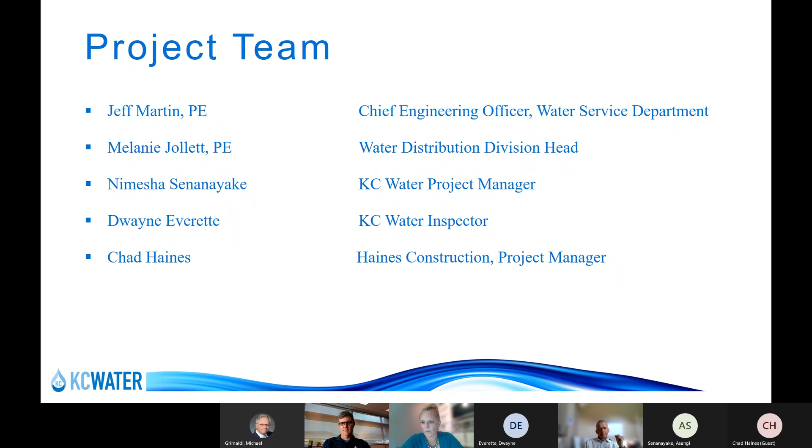Next slide, Nimesha. And with that, I'm going to turn it over to Jeff Martin, and he's going to give us some background information on water services. Thanks, Melanie. Good evening, everybody. Jeff Martin here with KC Water. So we'd just like to take a little time to remind everyone that KC Water is more than just your water utility here. We're actually 3 utilities in one. So we're your water utility, your wastewater utility, and your stormwater utility.

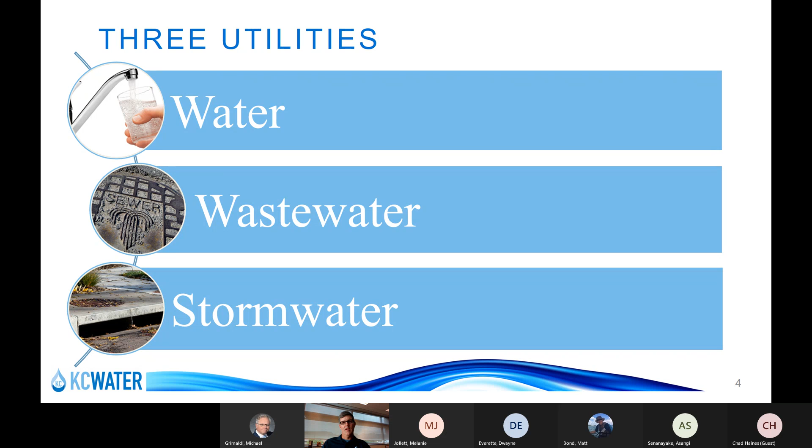So the next slide. So with that, in order to support all 3 of those utilities, we have a lot of assets in place throughout the city and beyond in the metro area. So for our clean water utility side, we actually have 1 water treatment plant, another 18 pump stations that pump the water throughout the city to all our customers, over 2,800 miles of water mains that run throughout to move that potable water around for all our customers as well. So it's really what the project that we're talking about here tonight focuses on, is replacement of some of that 2,800 miles of water mains.

So on the wastewater side, we actually have 6 wastewater treatment facilities spread throughout the city, both north and south of the river. Another 39 pump stations, 2,800 miles of sewer mains, over about 67,000 sewer manholes spread throughout the area. And then the third leg of our utility is our stormwater utility. That's probably the one that most people have the least knowledge of. They just don't realize what all is entailed with that. So obviously, a lot of people understand the storm inlets that are along the streets and curbs in front of their houses that collect the water off the streets. We have about 630 miles of storm sewer pipe in the ground to transfer that water. But then we also have 13.5 miles of levees along the rivers and streams throughout KCMO that we actually maintain to protect areas from flooding.

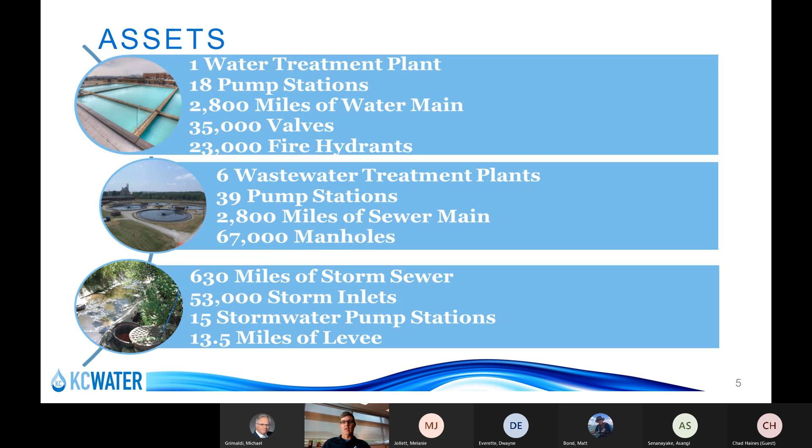So next slide. And really, with all 3 of those utilities, it all ties back into the Missouri River, really our one water source here for the metro area. So the Missouri River is where we pull our water from to clean it for everyone to consume. It's where our storm sewers eventually go back into, and then eventually where the wastewater treatment plants discharge that cleaned water back into the system. So it's vitally important that we help preserve the river, keep it as clean as we possibly can, actually hopefully cleaner than when we start with it, and keep it usable for everyone into the future. So next slide, I will turn it back over to Melanie to talk about our water main replacement program.

Thanks, Jeff. So as you all are aware, this is the public meeting for a water main replacement project. And so just a little history on our water main replacement program. The distribution system that KC Water maintains, it includes 2,800 miles of water mains. Some of these mains date back to the 1800s, so we do have some aging infrastructure within our system, and this is a challenge that many utilities are facing nationwide.

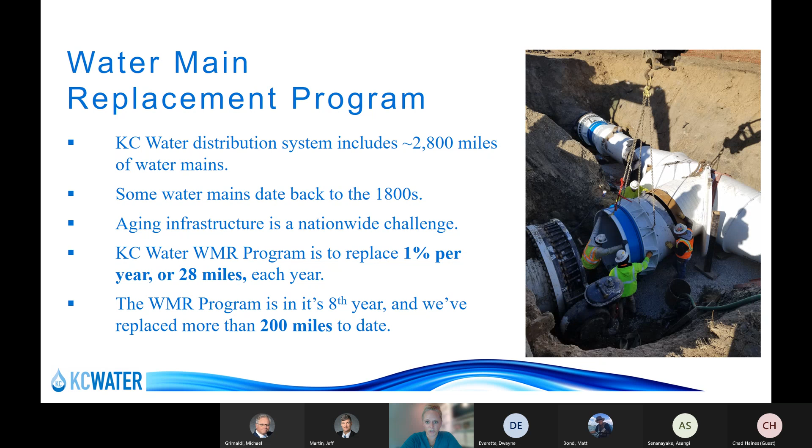Several years ago, KC Water implemented a water main replacement program, and the goal of this program is to replace 1% of our distribution system every year, and that equates to about 28 miles every year. We are in our 8th year of this program, and to date, we've replaced more than 200 miles. So we have seen great success with this program since we've implemented it, and it is our program to ensure that we are replacing our aging infrastructure. Next slide, Namisha.

So how do we determine which mains to replace and when to replace them? We do this through data-driven priorities. So basically, KC Water invested in a new software about a year and a half ago, and it's called InfoAsset Planner. And this software works with our GIS data, and it works with all of the asset management information that we have on our facilities, and that includes our water mains.

And so basically, we're looking at data that we have on our mains, including age of mains, how many breaks a main has had, the diameter of a main, customers that are served by this main, and a variety of other criteria. And we're looking at the likelihood and consequence of failure of each segment of pipe within our distribution system. We're able to establish a likelihood and consequence of failure score, and then assign a risk to each segment within our distribution system.

And so every year we take the top 28 miles of the highest risk mains for likelihood and consequence of failure, and we develop projects to replace those mains. So we develop a variety of projects that go through design and then into construction. And then this project is going into construction. It was designed a year ago.

All of our projects are designed to replace the water mains with zinc-coated ductile iron mains that are wrapped in a polyethylene sleeve. And this helps because this has a 100-year design life. So for the remainder lifetime of the new infrastructure, we should not see significant breaks or maintenance issues on the new infrastructure. So this long-term infrastructure plan will reduce service interruptions due to breaks, and it will decrease costs because there will be less maintenance on the mains.

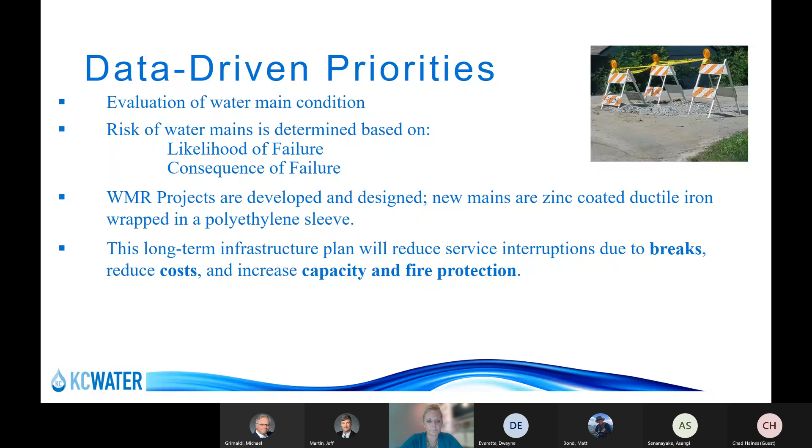Next slide, Nimesha. Okay, and so with that background information, I'm going to turn this over to Nimesha, our project manager, and she's going to go into specifics on this project in detail. All right. Thank you, Melanie. Right. Can you see my screen? We can, yes. Okay. Good evening. This is Nimesha. I'm the project manager from KC Water.

So on this slide, you can see the overall layout of the project. This is our project map. That's about 1.9 miles altogether, or in other words, 9,948 linear feet. I will talk about the 8 line segments we are replacing, and then we'll talk about what to expect throughout the project duration, and also the project schedule will be explained by our contractor, Chad Haines, towards the end of the presentation.

So line 1, we're going to replace about 1,555 linear feet along Northwest Caney Creek Drive with 8-inch ductile iron pipe that will be between Northwest Hilldale Drive and North Chinquapin Court. Line 2 will be replacing 723 linear feet along North Chinquapin Court between Northwest Caney Creek Drive towards the end of this cul-de-sac. We'll have 8-inch ductile iron pipe, and it will get reduced to a 6-inch towards the end.

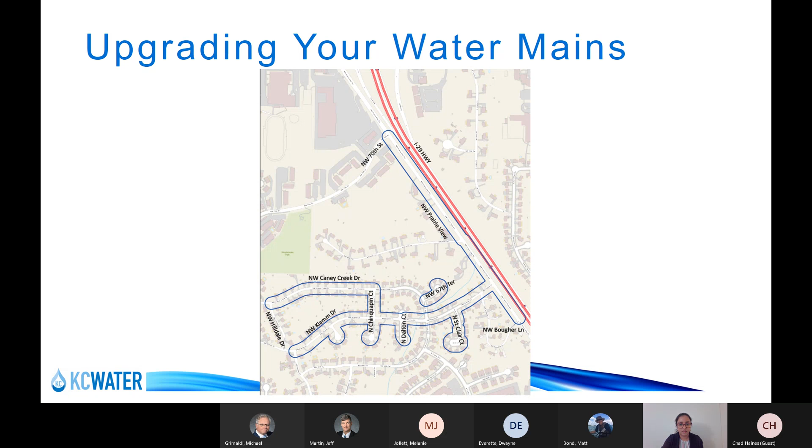The last line is Northwest Prairie View Road between Northwest Bougher Lane and Northwest 70th Street. That'll be about 2,763 linear feet. So altogether, that'll be about 1.9 miles. Moving on to the next slide.

So what happens on your block? First of all, utilities will be marked and potholed to verify the location and the elevation. Then our approved traffic control plan will be implemented. We'll saw cut the pavement, a narrow trench will be excavated, and we'll bury the new pipe in gravel. During this time, I will also explain, there will be 3 planned water outages.

The first one would be to construct a temporary connection between the existing water line and the new water line. That is to test and disinfect the new water main. The duration would be a maximum of 4 hours unless there is an unforeseen challenge. In that case, we'll make sure we work diligently to restore the water back. While we wait for the results to come back, you'll see little to no activity in the area, and that may take a week or more.

The second outage would be once we get the approved results back, with both the new and the old water mains in service, we'll transfer the customer service lines from the old pipe to the new pipe. And during that time, if your meter is also inside the property, we'll remove it and install a new one in the yard.

Third outage is to construct a permanent connection and abandon the old water main. Finally, there's also restoration, temporary and permanent. We will restore the curbs, sidewalks, driveways, and in season, the lawns that we disturbed.

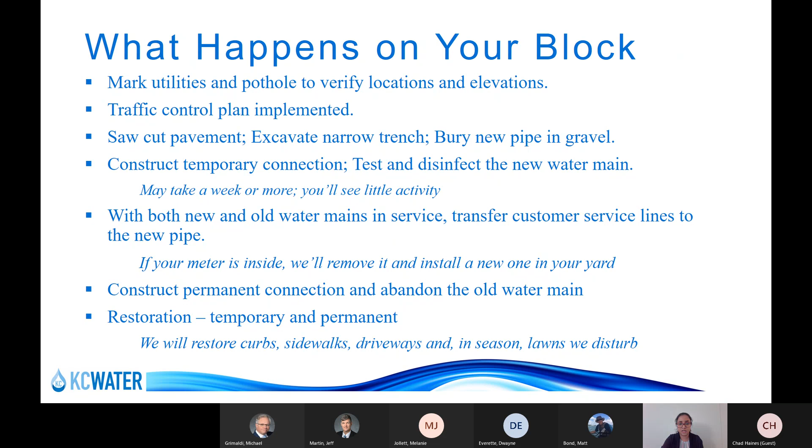Affected curbs, driveways, and other pavement will be restored per KCMO Public Works Department standards. The disturbed established lawn areas will be sodded after work is completed and as the season permits. Ordinary travel routes may be temporarily restricted according to our traffic control plan. Also, at the end of the project, this will reduce the chance of water main breaks in future, and our fire protection will be enhanced in the neighborhood.

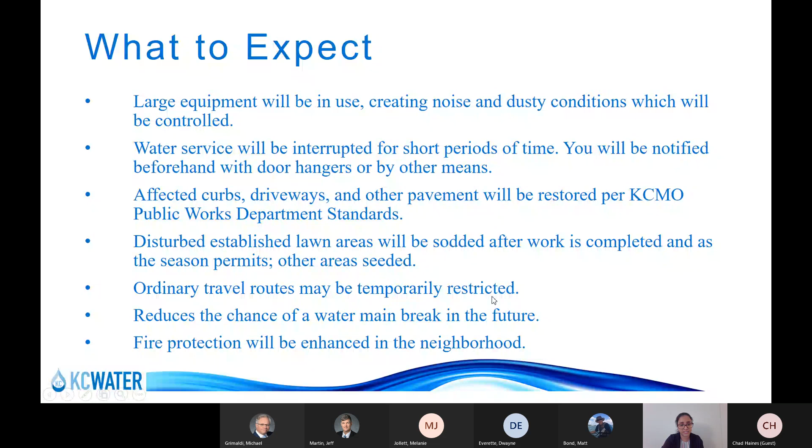Next slide. There are a couple of houses where the water meter is inside the property, and if that's the case, we will first make an appointment with the homeowner, and we'll relocate this water meter into the yard onto a meter pit.

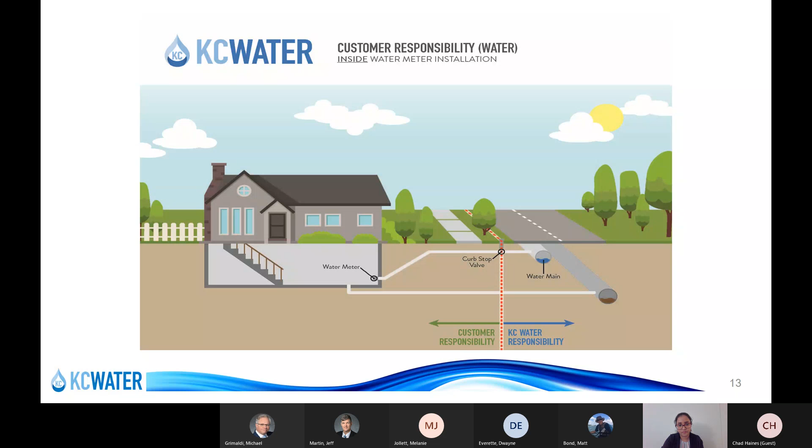Next slide, project sequencing and duration. This will start next month, August 2021, and the final completion will be April 2022. This is the final date. Our substantial completion will be in February, towards the end of February. That means by February, we should have all the lines installed and restoration complete. So between February and the end of April, we will take care of other minor issues that we could not take care of before. I'll let Chad jump in and talk about the project schedule.

Okay, we will be starting on Clam Drive, working from the west to the east. Most likely it'll be done in 2 segments so we can get all the other streets and services done during that time, all the way towards Prairie View Road for one crew. Second crew will be on Northwest Caney Creek Drive, working that line, and then we'll start back over from the west, going back to the east on Sweetbriar Court, Dalton Court, St. Clair Court, and then come back to Chinquapin Court. That'll be the second to last one. The last one will be Prairie View Road.

Okay, sounds good. And we provide notice prior to starting work in the neighborhood, and you should always have access to your property, and if you don't, please make sure you let the contractor know, or just contact me. I will have our contact information towards the end of the presentation, and we'll make sure you have access to your property.